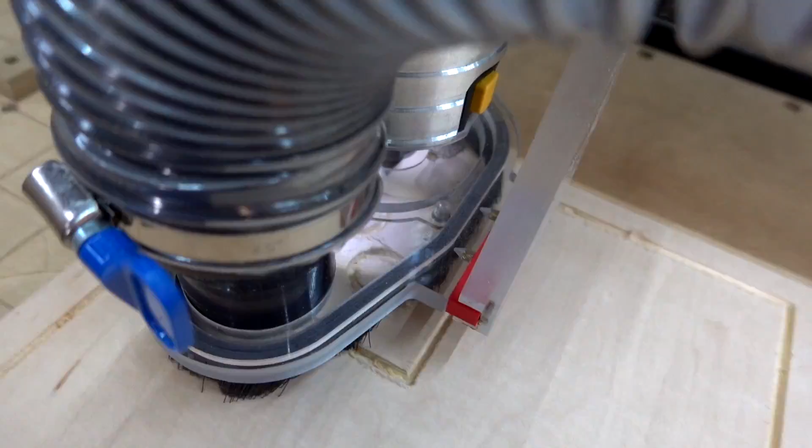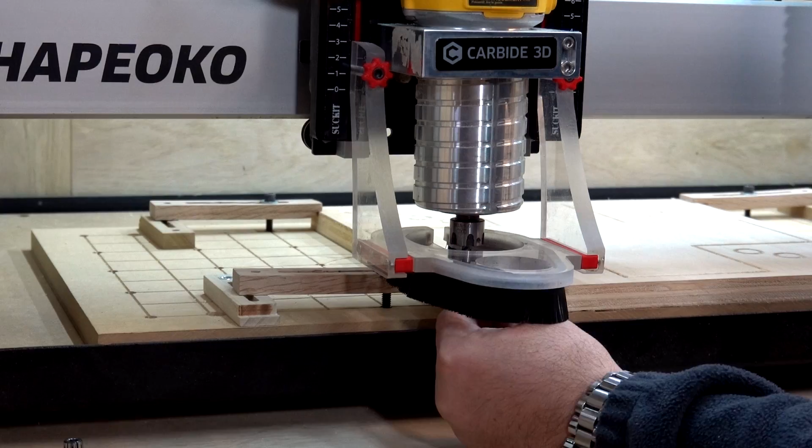Okay guys, so we got a little bit of an issue here. For some reason it started off good, cut these holes in here like it should have, got that one, and then for some reason it skipped that hole, got that one good, and then it air carved the first pass on all these holes, and then did the second pass and only got down halfway.

Okay, so first thing we're going to do to troubleshoot this is go back in the house and check our tool path and make sure everything's good, and we'll see if we can find a solution.

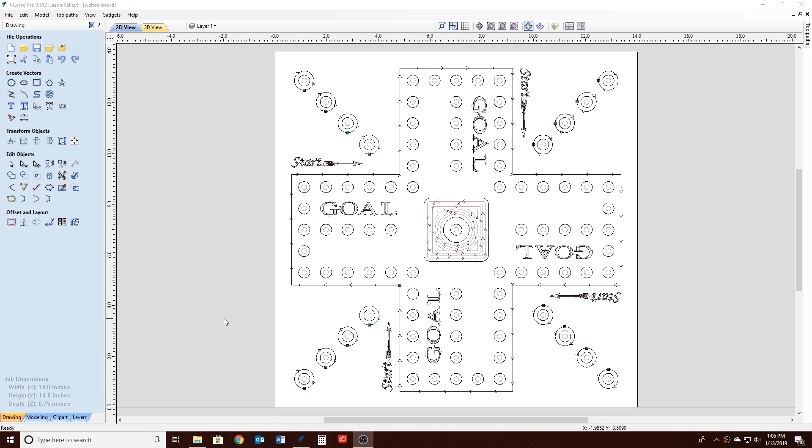Okay, so here we are in VCarve Pro again, and we're going to check and see if there's something wrong with that tool path. Keep in mind, I grouped all 3 of these together when I saved them, so that all the 1/4 inch tool paths would run at the same time. I've run into issues in the past when doing that. So first I want to see if all the tool paths are correct.

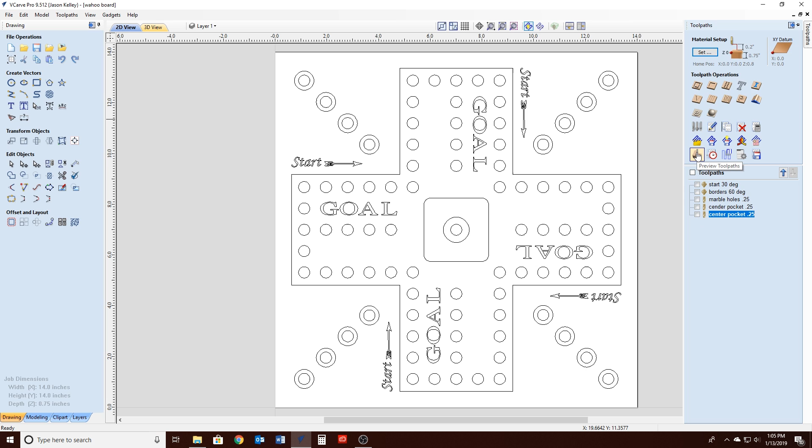So we're going to simulate the first one, which is the center pocket. Let's see if that one's good. Okay, that should be good. All right, reset the preview. Simulate the center pocket hole.

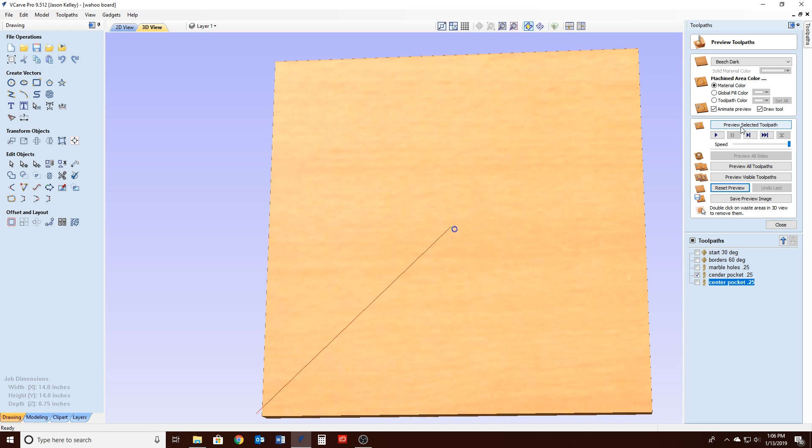Wow, look at that. I must have been off my meds yesterday because I totally botched the names of those tool paths, but that doesn't affect it. Oh wait, we need to highlight that. All right, preview selected toolpath. Okay, so that worked.

You know what, let me pin this out here so I don't have to keep doing that. And then let's check out the marble holes. Reset, preview them. They all look to be the same uniform depth and everything else.

Okay, so I saved all these tool paths under the Shapeoko inch post processor. So I'm going to do two things, and we'll see if this fixes it. First, I'm going to save them under the Grbl inch post processor, and I'm going to save them separately, so I'll run 3 separate tool paths. Let's do that right now.

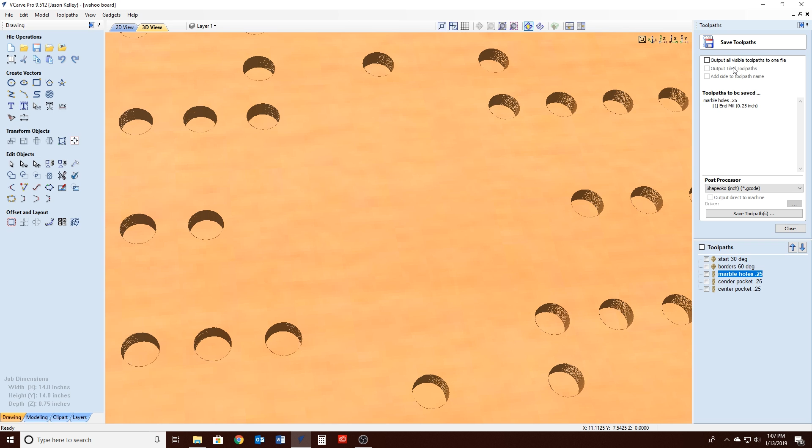So first of all, we're going to save — we're going to uncheck that because we don't want all of them saved to the same tool path. For some reason I think that functionality ends up screwing you up every now and then. It's happened to me in the past, and that's the only thing I can think of.

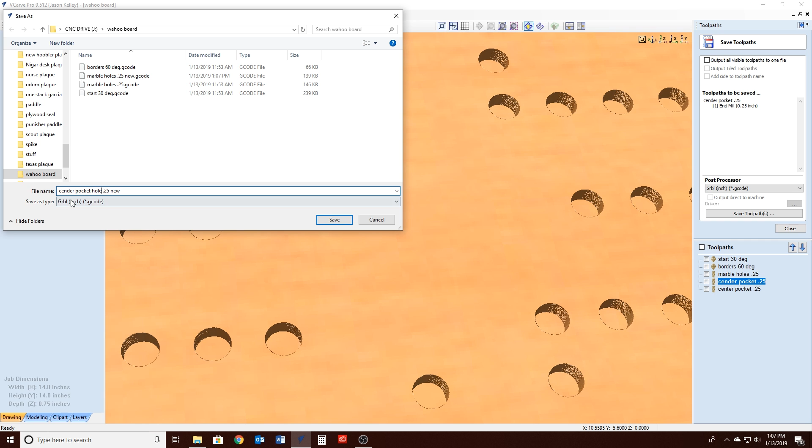So all right, we're going to change this to Grbl, G-R-B-L, Grbl inch. Okay, save toolpath, and I'm going to name this 'new' because I want to make sure we can differentiate them. And then we'll save this one — I'm just going to add the word 'new', center pocket hole. I'm going to leave that D there just to remind me that I'm an idiot sometimes.

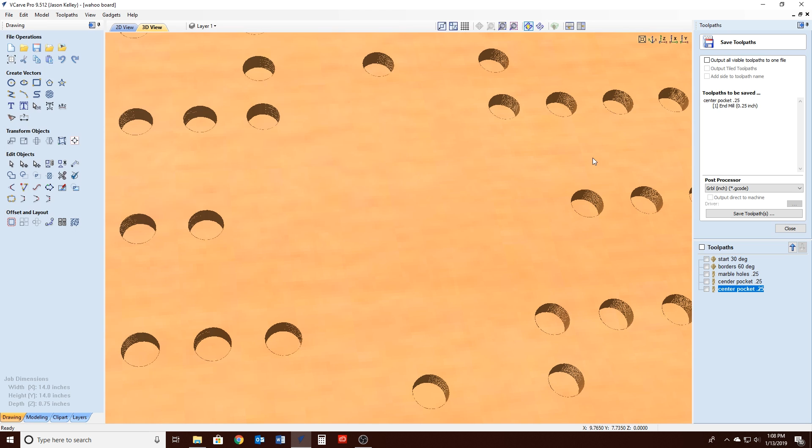And then the marble holes, we'll save that one. Oh, we already did that. What was it? That one, center pocket. Center, new. Okay, center pocket 25 new. Save. Okay, so that should do it. And let me just make sure I got those 3 in there: center pocket 25 new, center pocket hole 25 new, and marble holes 25 new.

All right, well we're gonna get back out there and we'll try it again, see if we fixed our issues. Okay, so the machine has the same exact zero that it did before. I just rehomed the bit, and I'm gonna go turn on the shop vac, and we're gonna run this first tool path to see if we get our holes drilled the way we're supposed to.

Okay, so unfortunately we've run into the same exact problem, so I'm going to have to get in there and do some more troubleshooting. I don't really know what's going on. This is one of those things that just boggles my mind. We saw the tool path, it was good, the simulation showed everything was right on point. I don't think my board is warped. I don't know what the problem is. I'm going to have to get in there, and when I figure it out, we'll come back and get to it again.

Okay, so as you can see, all the holes are in there like they're supposed to be now. The outline, everything's there, minus the center pocket. We haven't run that yet. I did manage to get the holes toolpath working properly, and I believe I figured out what the problem was. You may not believe me when I tell you this, but let me show you.